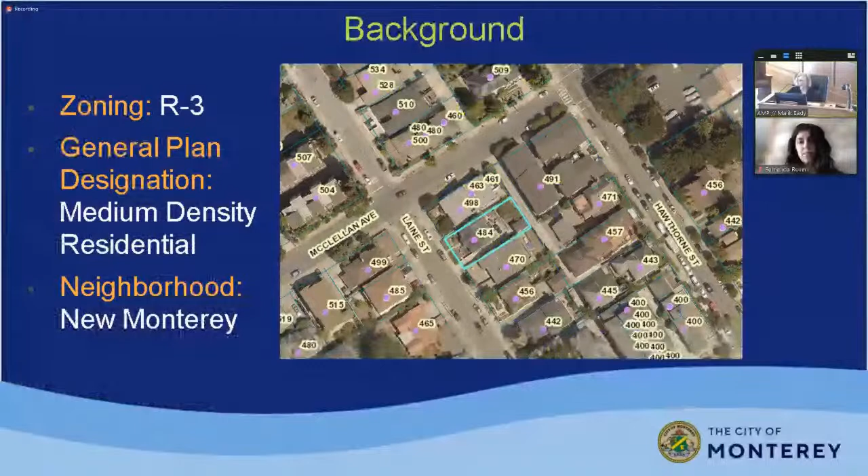As background, on September 1st, 2021, the Architectural Review Committee approved an architectural review permit for a first and second story addition, a new reconstructed and expanded second story rear deck, and exterior alterations to the two-story dwelling. I want to review what was approved under that permit, so you're familiar with what was approved then and what's being added now. Under the architectural review permit, a 435 square foot addition was approved: a 197 square foot second story main level addition, and a 238 square foot first story habitable basement addition. Also the demolition of the existing second story deck, and then a reconstruction of that deck to 272 square feet, which is also an expansion of their existing deck, so it'll be larger.

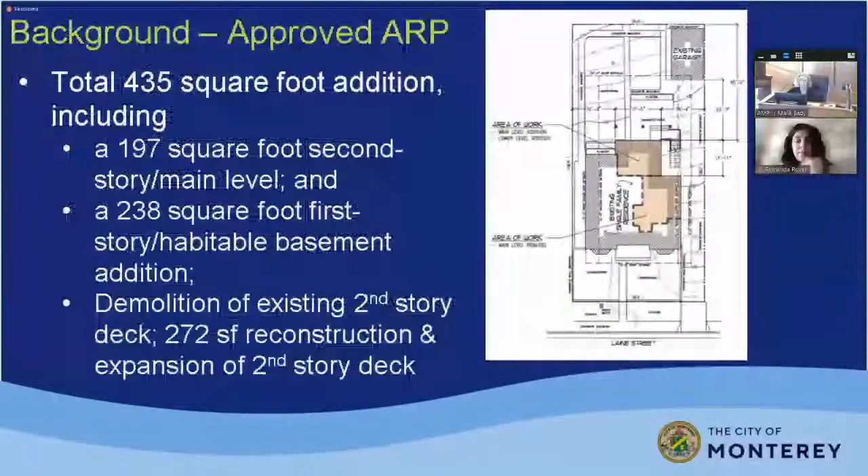None of these changes - no construction has taken place yet on this approval. So this is comparing the first and second story existing, and then the approved, under the architectural review permit. The highlighted is what was approved, the addition for the first story.

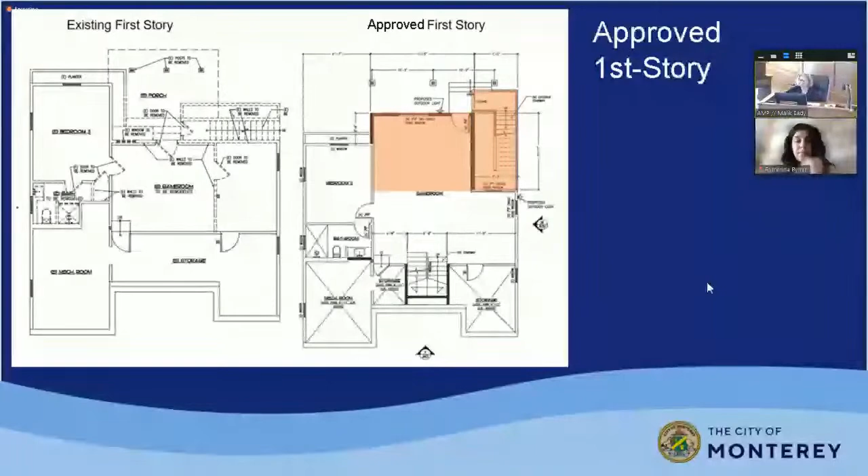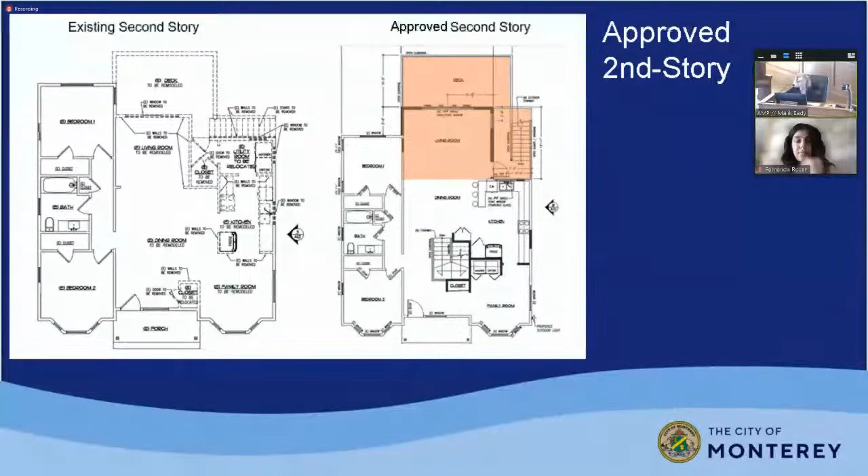Here's the approved rear addition showing the existing second story deck as it is now, and then what was approved under the architectural review permit.

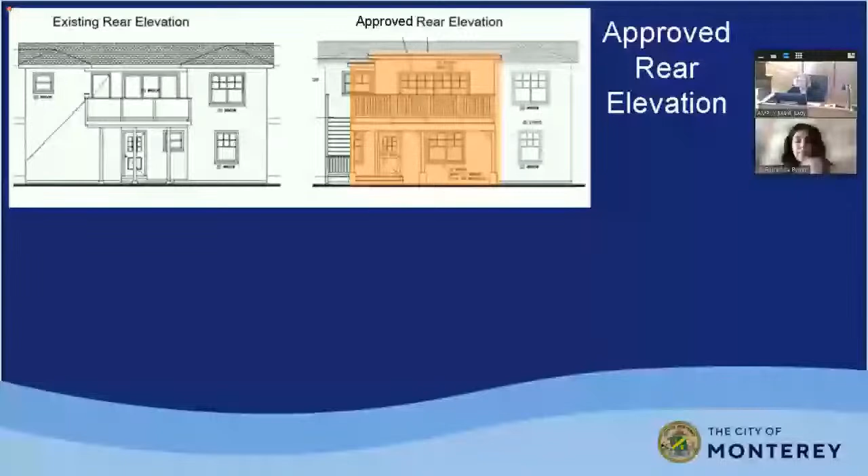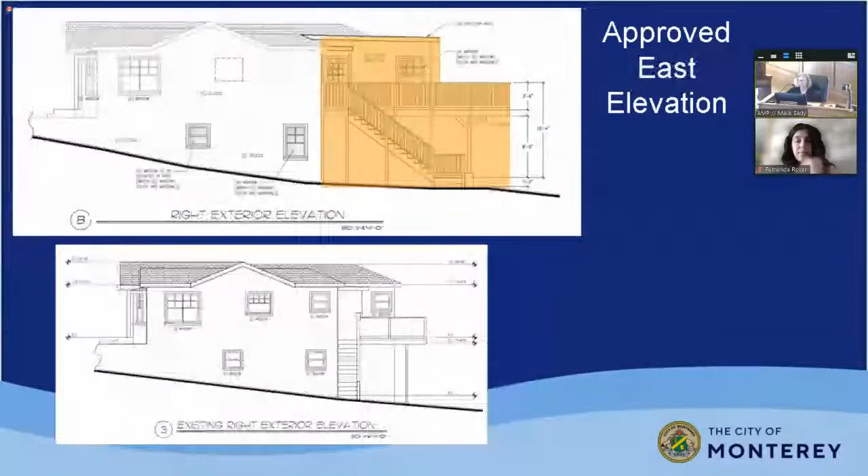The east addition here. The bottom is the existing, the top is the approved. And then what was approved was a 2% slope roof for that area.

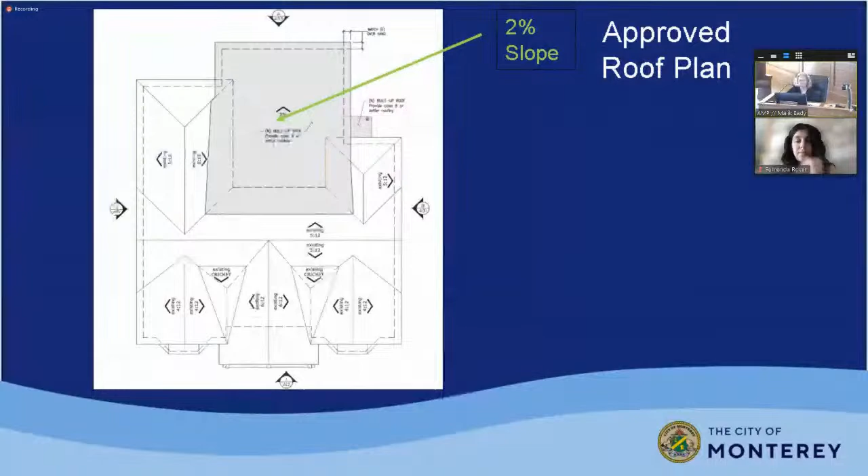Under the permit amendment for the architectural review application, the applicant proposes to increase a portion of the roof height from 21 feet 6 inches, as approved under the architectural review permit, to a maximum of 25 feet with the construction of a gable roof over the rear portion of the house.

As required, they received a letter from a professional engineer confirming the new roof structure can be supported by both the existing and new wall framing, floor framing, and foundation systems.

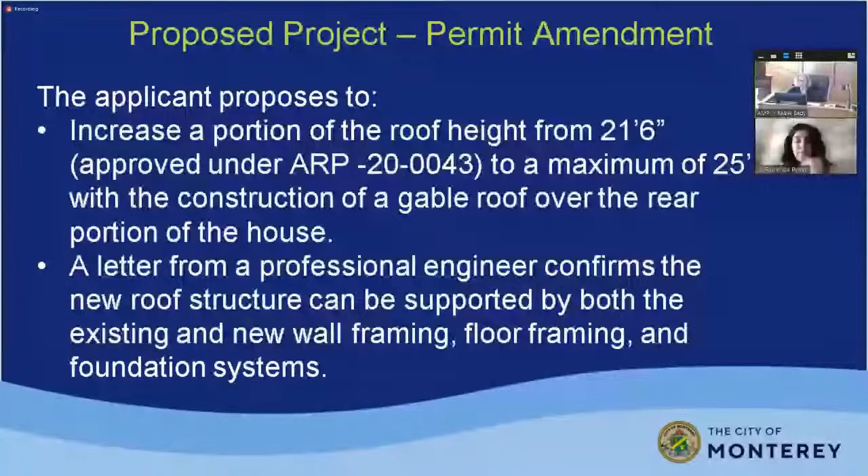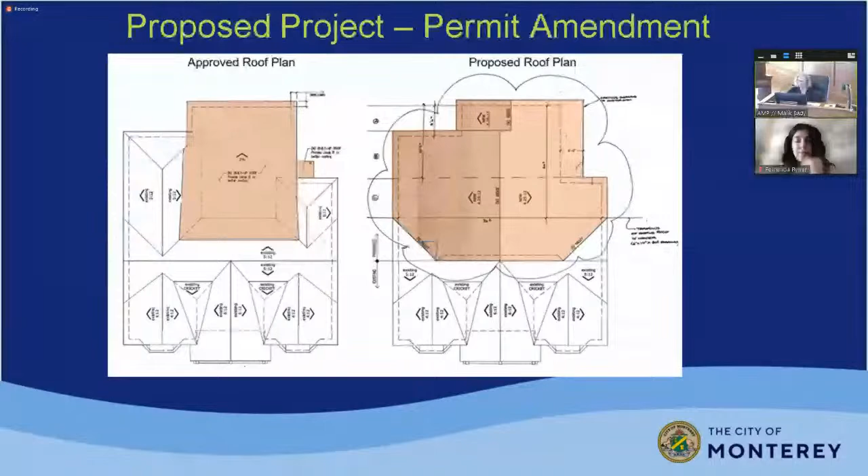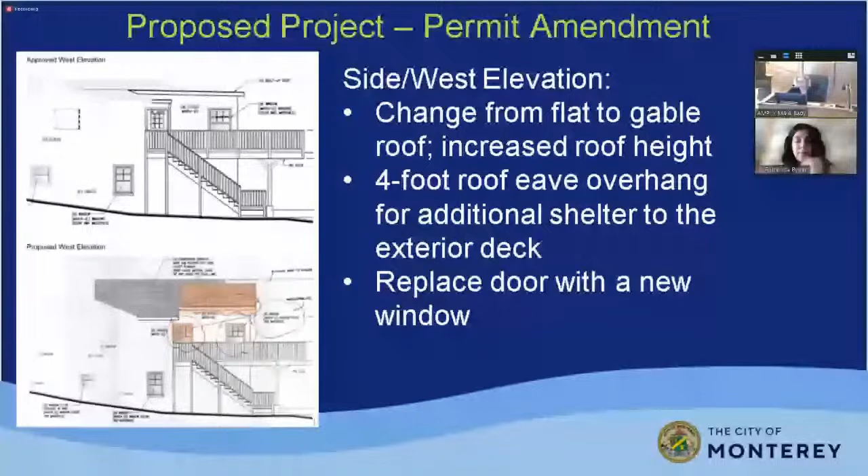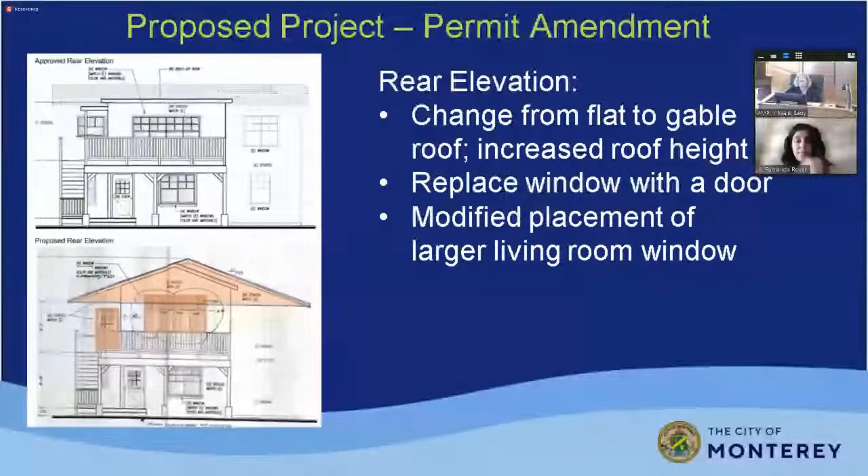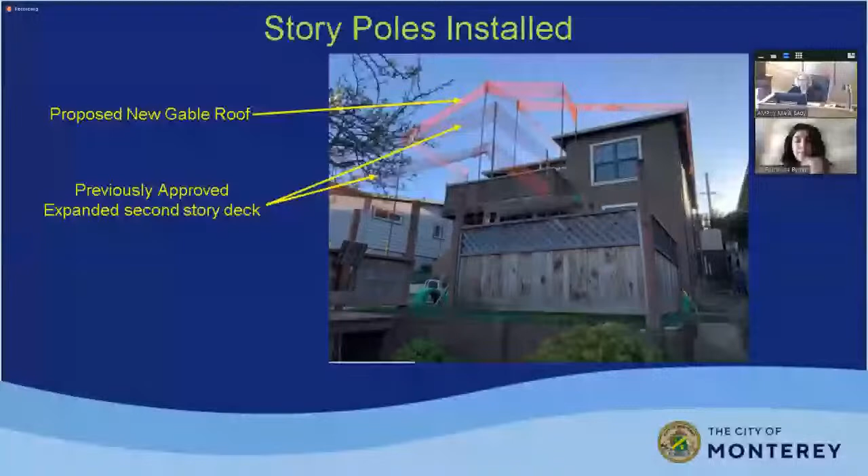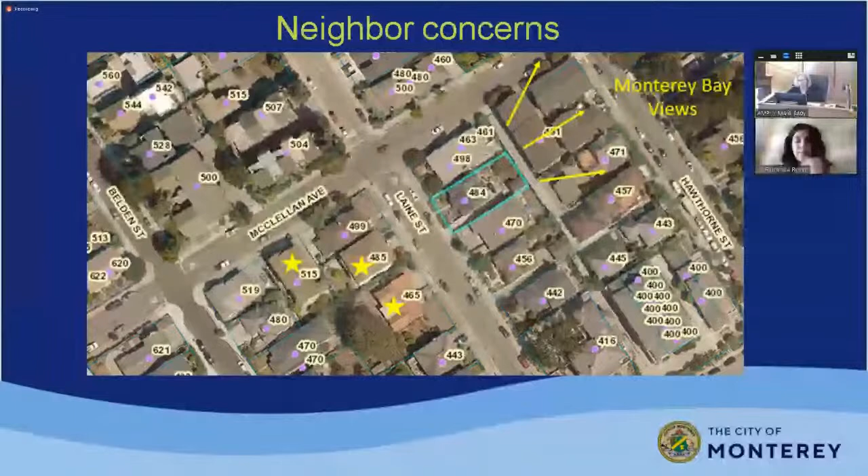Oh. Oh, that's great. Okay.

Before I go through the findings, I wanted to let you know that in attachment 2, there is a letter from one of the neighbors requesting that the property owner lower the height so they could take better advantage of their bay view that they currently have. While staff is recommending approval, I just wanted to make you aware of that from the neighbor.

I received an email from somebody—it was still the starred addresses, the people I'm talking about. They all just had concerns about their views, but this is the only actual formal letter we received requesting the applicant reduce the height.

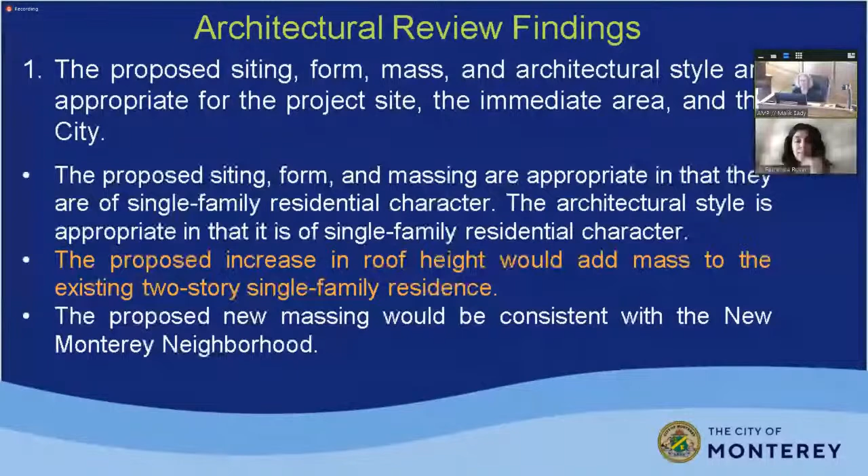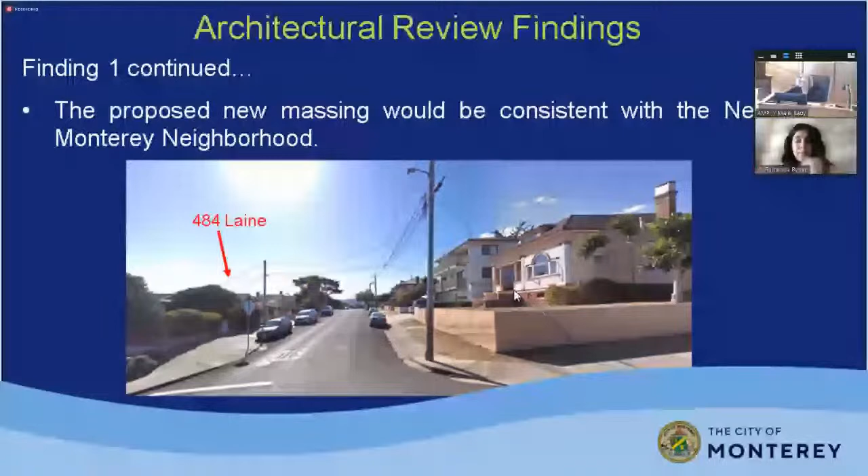The proposed project would not unreasonably impair the views, privacy, or living environment currently enjoyed by other properties in the vicinity. On the west elevation, the door to be replaced with a new window would be in the same location.

On the east elevation, one new window location would be from the previously approved rear addition.

The neighboring residence does not have a window facing the east. Maybe I should show you a picture. So this is the location here. You see the window highlighted on the proposed east elevation. That's the window I'm talking about, and it's set back a little bit.

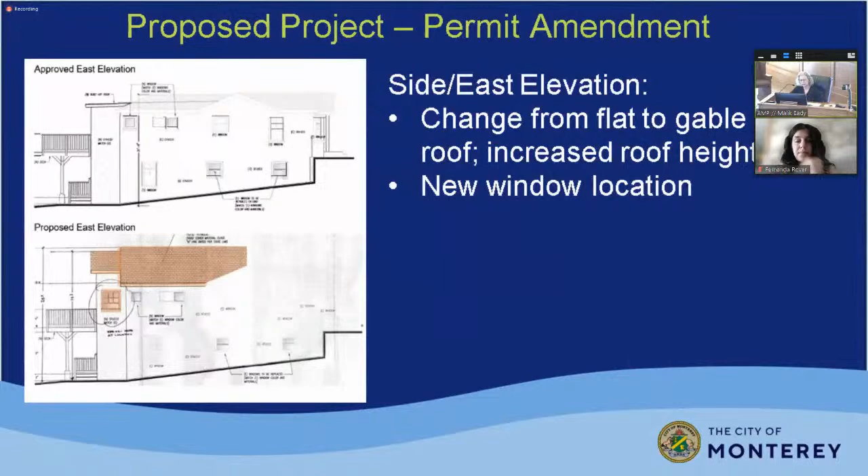So I'll go back to my finding that the neighboring residence doesn't have a window facing that east side, and the proposed new window on the wall of the house we're talking about is set back from that main house. Therefore, staff does not anticipate any privacy impacts, and the neighbor is aware of the project and hasn't commented on that. I believe she's online right now.

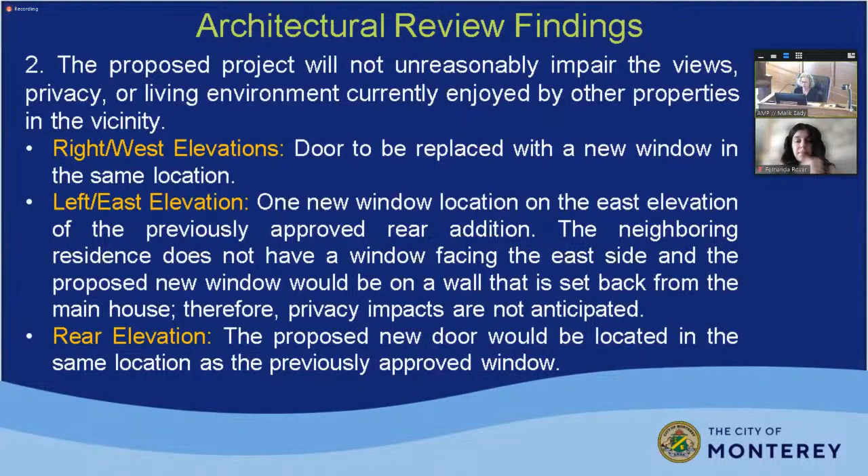The rear elevation has a proposed new door that would be located in the same location as the previously approved window, so I don't see any issues there. So there would be no privacy impacts from the proposed new window, modified new window location, and changing out a door to a new window.

The proposed increase in roof height is not anticipated to substantially change the views of Monterey Bay enjoyed in the neighborhood or living environment currently enjoyed by properties in the vicinity. While it does take a portion of it, it wouldn't substantially change their views.

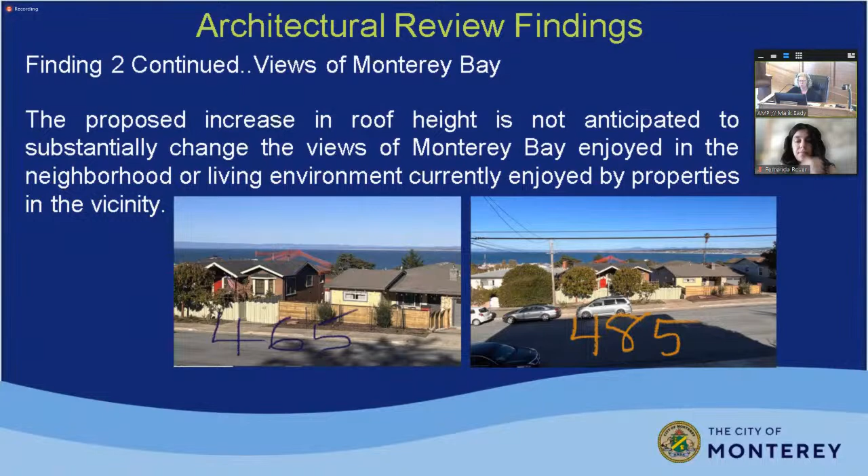But I know some of those neighbors might be commenting later, so I just wanted to make you aware of that.

The project is consistent with a medium density residential land use designation, and the remodel and addition would be of a single family residential character. It is consistent with the New Monterey area plan.

I wanted to make you aware of a policy that's in there: if the property were on a slope of 15% or more, they would need to step down any building heights in the R3 areas. And the lot is at 14%. So they just missed that, but I wanted to make you aware of that.

The proposed finish, colors, materials, landscaping, lighting, and all other exterior features will be consistent and appropriate with the immediate area. The new gable roof would be finished with composition shingles to match the existing roof. New windows would be Milgard fiberglass to match the existing windows. New doors would be solid wood to match the existing. These finishes are appropriate - they would complement the architectural style and be of single family residential character.

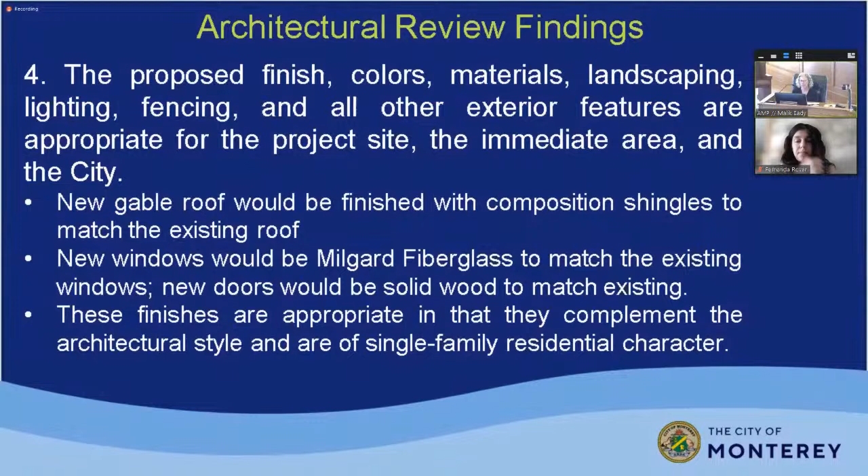Staff recommends that the Architectural Review Committee approve permit amendment application PA 220194 for preliminary and final architectural review of an increase in the second story roof height to a maximum of 25 feet, modification of the second story roof form, and exterior alterations to an existing 2-story single-family dwelling at 484 Laine Street. I'm available for any questions, and the applicant is also here.

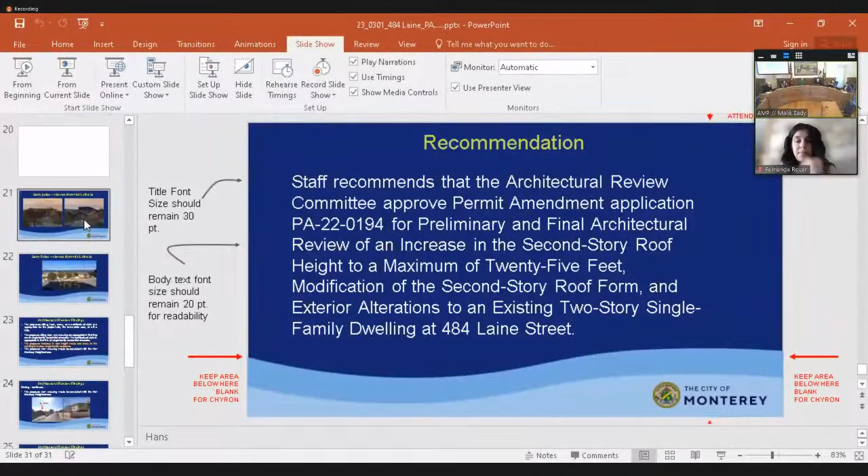Could you also please go to maybe an elevation again? I feel like I'm missing something. It seems like the height is higher than the existing peak of the gable, and I just can't tell why that is or how that would be finished on that side, which seems significant.

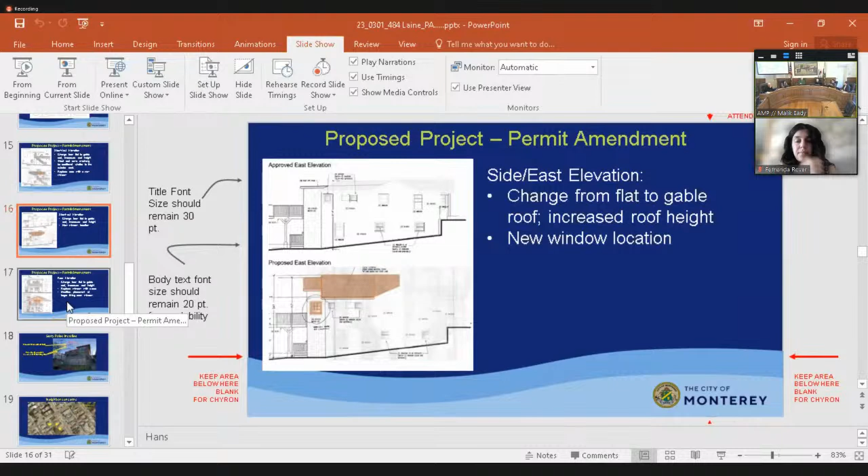Which side did you want to see? This works, but it's just a little bit of clarity would be helpful on how that's being finished on that plan, right side or the elevation.

I'm not sure, so this is a rear elevation. Yeah, but it's the other side I'm concerned about, the front elevation, because it seems like it's sticking up higher than the rest. Because that's the peak right there. Yeah, and then here it goes way above it. Because the building is wider.

But then that would require some interesting detailing, I would think, to make that work. So that part's unclear to me, what's happening.

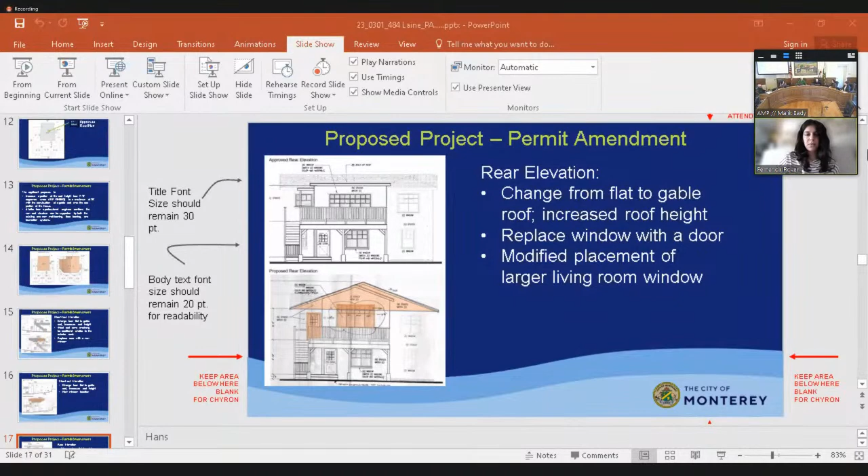We're all Zoom experts. Can you see that now? Oh, yes, now we do. Oh, great, okay, thank you, Fernanda.

The question is the height of that gable - if you're looking at an increase of basically 3.5 feet, is that how high that gable goes above the initially proposed and approved line? Maximum would be 25 feet, and that's the measurement based on the definition of height. But before we had approved a height of the ridge line of the roof at 21.5 feet, is that correct? So basically what we're looking at here, 25 feet is roughly 3.5 feet higher. Yeah.

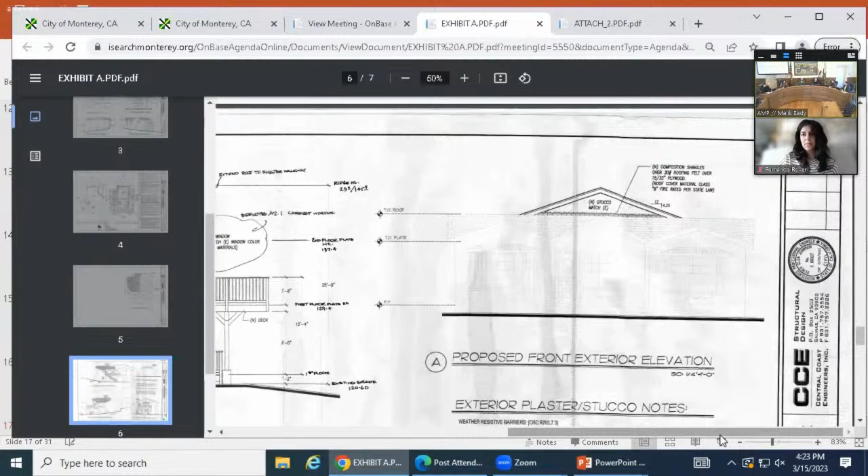And I can't read the note on that elevation - is it 4.25 and 12? It's 12 over 4.25. Okay, correct.

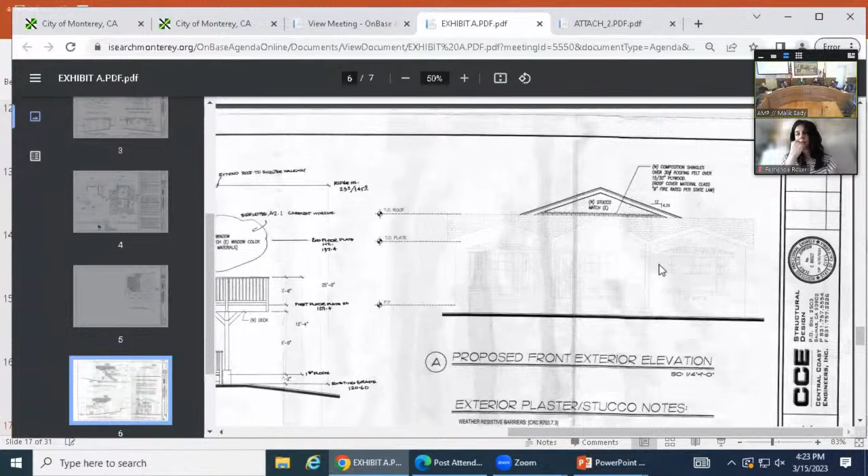Would it be possible for them to lower that peak so that - is it at the same? Sorry, is this a question or a comment? I guess a comment. Well, we can ask it. Sure. Well, I mean, is it physically possible for that peak to be moved to the existing roof line?

Or is that an aesthetic thing? I don't understand where that is. I don't see why the roof pitch can't be reduced, but we'd have to ask. Just curious. I mean, if it's like, no you can't, because then that would make the outer walls in that room 6.5 feet or something, like the slope wouldn't work. I don't know. Right, maybe you can clarify for me.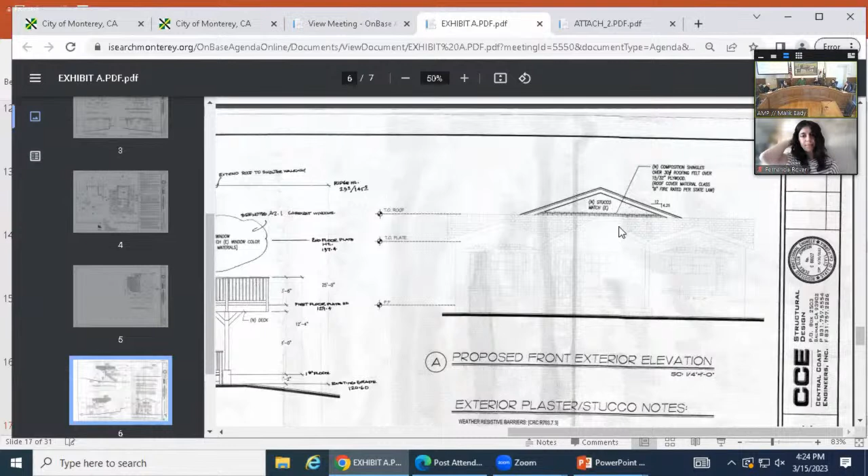This is on the front, facing the street, yes. This is the front elevation, but what they're proposing, the change in the roof - oh sorry, that's at the rear of the house. So the front is here, and this is the change. And that, what we were just looking at, was the proposed front - yes, and that's not shown in the story poles, that that's going to be higher.

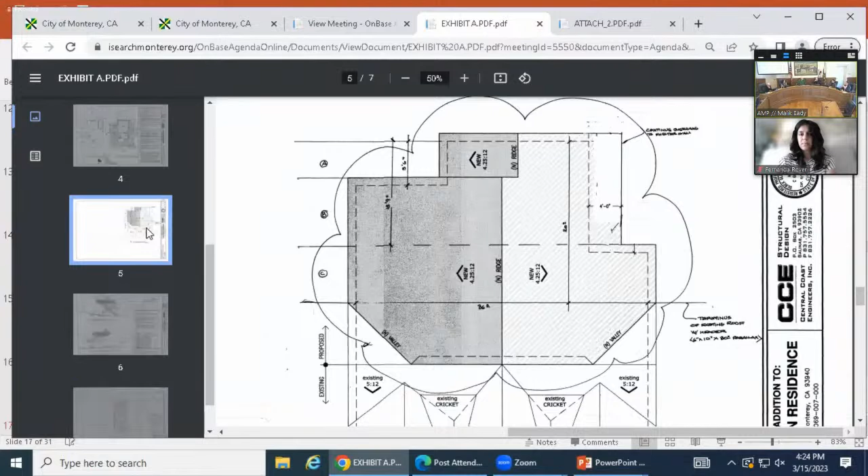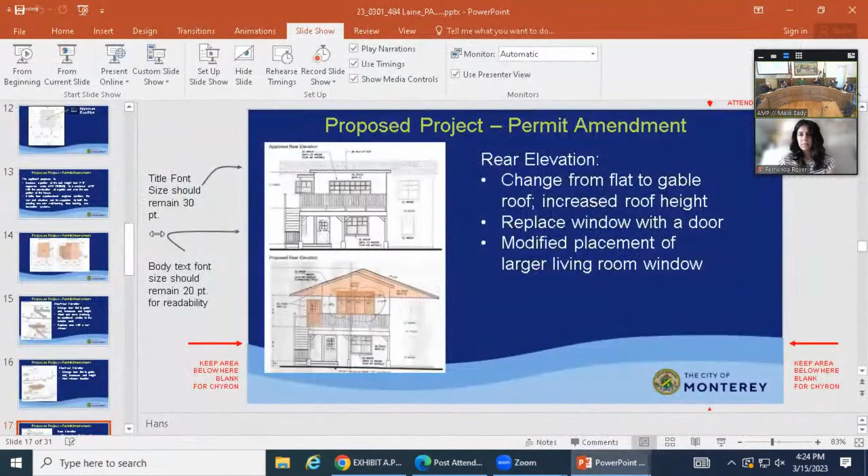We can look at the story poles. I do have that, did it show? You want me to show it again? Showed the back? No, it's the views from the other homes that show it. Oh, the neighbor pictures do sort of show it. But there's nothing on the front of the house that's changing.

No, it's an elevation. You're just seeing the back, seeing what is sticking up. Right, that's the things in the front that are faded in that image.

Do you understand that? I just want to make sure. Not really. That's okay, I'm confused. So the roof pitch changes at the rear only. That's what I thought. But you can see that from the front. Got it, okay. It sticks up above the existing roof.

I thought this was also on the front. No, that's the addition, correct, just visible from the front, sticking up from the back. Got it, right, just the back.

Are there any other houses in the area that have that kind of split? We could look at Google, but I don't know. Or just a few of those images from the residents might show adjacency.

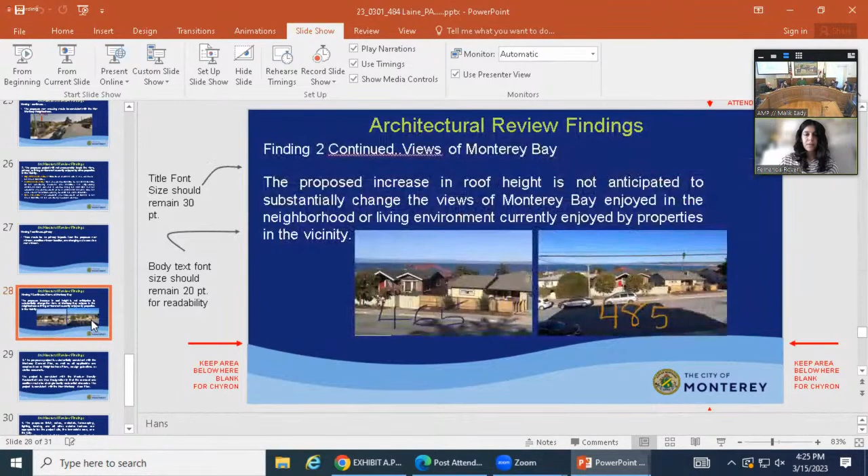I didn't hear committee member Schmidt's question. He's asking if there's any other houses that have a lower front elevation and a higher rear elevation in the neighborhood. I wasn't looking for that, but that's a very good question. I am aware of a project that was very similar to this, where a similar roof form was approved by the ARC on Lily Street.

Oh yeah, that was a couple years ago, about 2 years ago. We can do a walk down Google Street View if you'd like. I don't think that's necessary unless anybody else wants to see it.

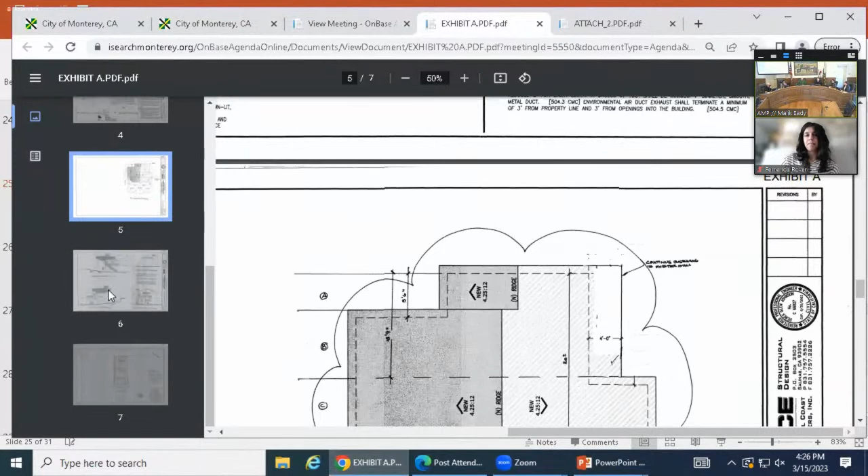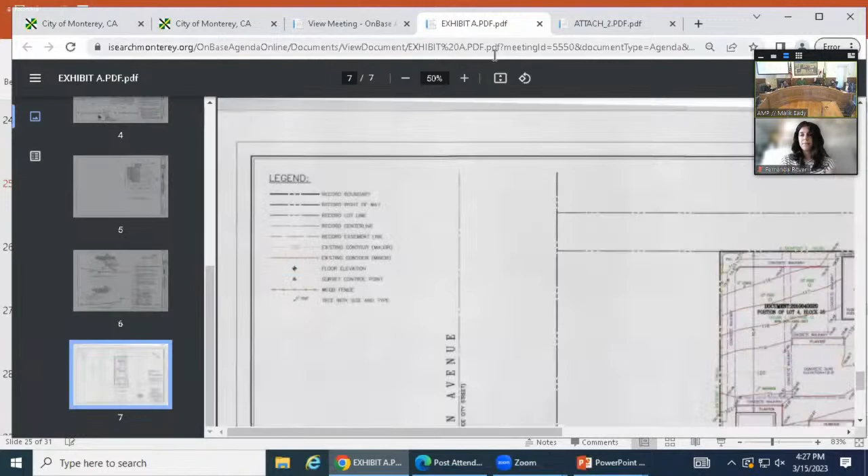Is there an existing roof plan or just the proposed roof plan? Yeah, I don't know, let me see. We might be able to look at the previous plan set, it might be there. No, I don't know if I attached that or not.

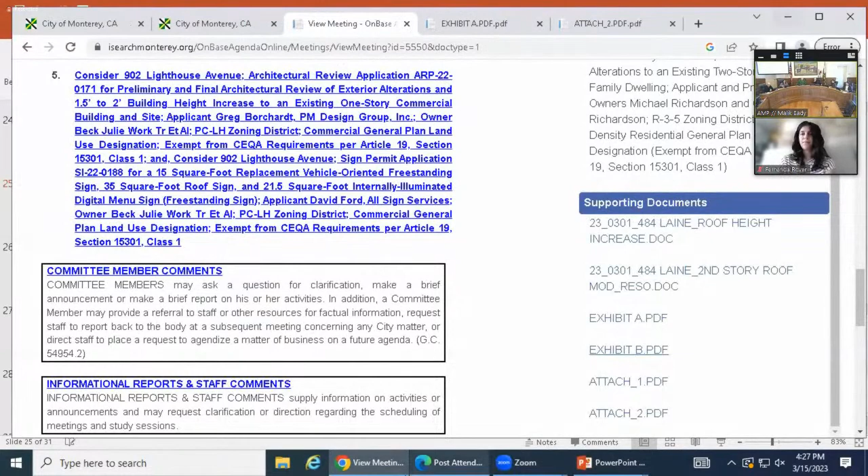Okay, that's probably where I got it. Let's look at that. Oh, in my report. If I just click on the right thing. This one, sorry, yeah, it opened.

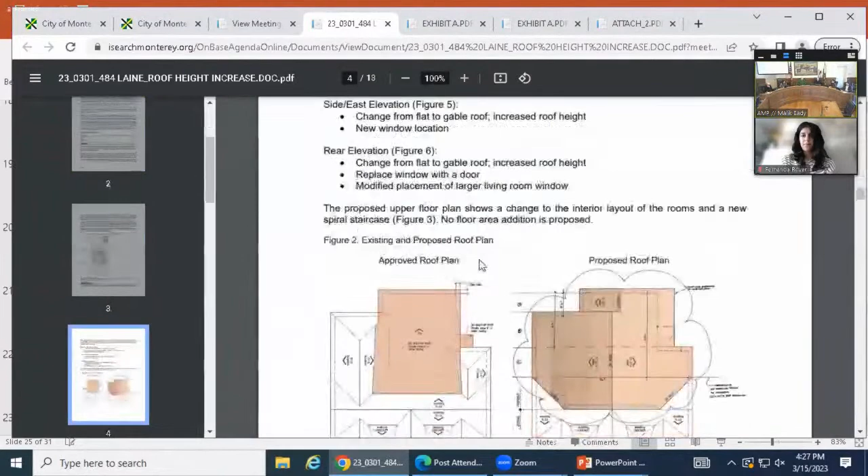Okay, yes, well at least it shows the approved roof plan. It's not showing the existing though.

Patrick, in response to your earlier question, I think if you look at the existing roof on the left-hand side, I think they're tying into those small pitched sections, and just building off of those. So you were asking if you could lower the roof. I don't think you can, because I mean obviously anything's physically possible, but I think they're trying to tie into those existing roofs. That pitch is, yeah. Got it.

Makes sense. Any other questions for Christie? If not, then I'll go ahead and invite the applicant if they'd like to make a statement.

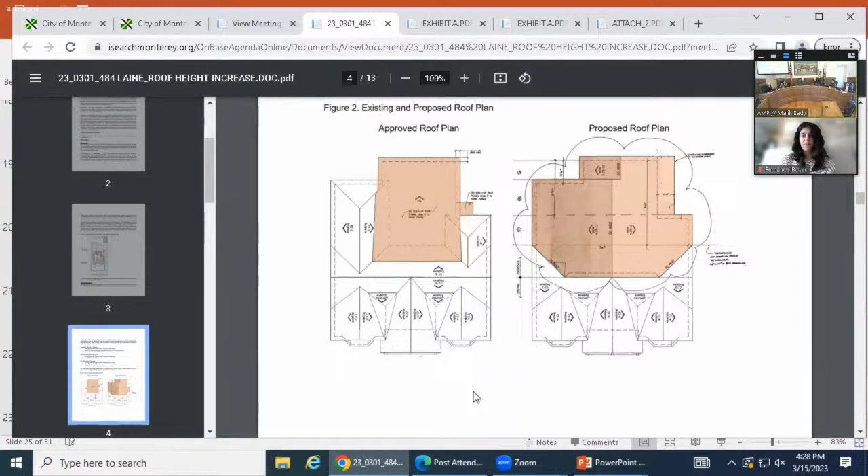Please state your name. Ms. Rivera, can you hear me? Ms. Roveri? Yes, okay, yes, thanks. Hi there, I'm Michael Richardson. My wife Caitlin and I own the home at 484 Laine Street.

I appreciate you all taking a look at this today and distinguishing between what we've proposed and what our neighbors are suggesting. I'm available for any questions, though I can't give specific technical information since Mr. Johnson, the actual structural engineer, isn't here today. But I'll do my best.

Any questions for the applicant from the committee? No? Okay, thank you. Thank you for coming.

All right, with that I'll open this up for any public comment. Do we have anyone online, Erica, that would like to speak to this agenda item? There are 5 attendees, I currently see no hands raised. I can go ahead and remind the public how to join, please.

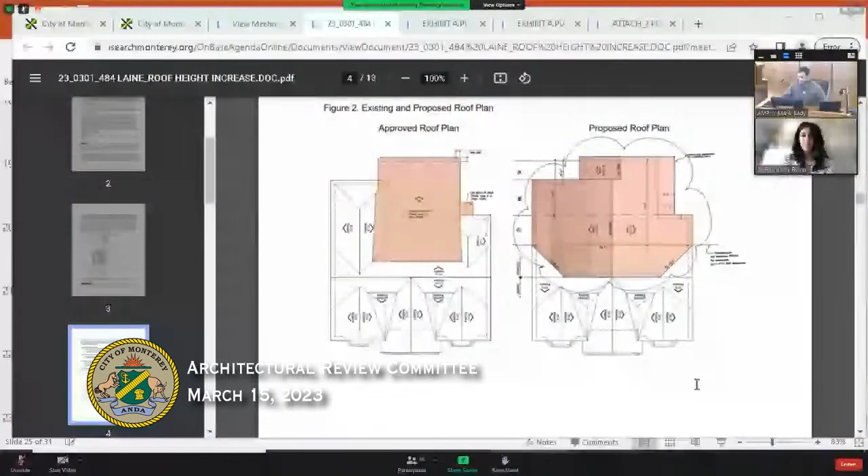Yes, thank you, Chair. My name is Chris Schmidt. I'm a senior associate planner for the city of Monterey, and I've been working with the applicants for this project.

So to shorten that title, it's a proposal for some exterior alterations, new materials, new paint color scheme, a height increase that ranges from 1.5 to 2 feet, as well as new signage at 902 Lighthouse, which is a Carl's Jr. franchise.

So staff's recommendation is to adopt a resolution approving the architectural review and sign permits with conditions of approval. These conditions actually change what the applicant's proposal is, and I'll explain that in my presentation.

So the project site is located in New Monterey. It's at the border of Monterey and Pacific Grove, at the corner of Lighthouse Avenue and David, where Lighthouse turns into Central as it goes into Pacific Grove. It shares a parking lot with the Andronicos Market.

So we've already mentioned what the permits are for. The city requires architectural review permits, ARP, for exterior changes, increases of height, new landscaping, and the like. Here we have a new paint scheme, new parapets, which constitute the increase in height, new roof material, and then new paths of travel in the landscape areas.

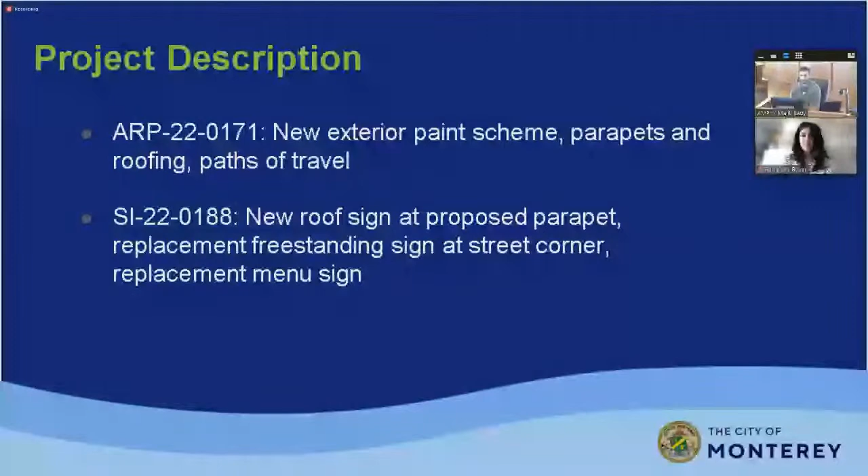So this site plan shows the site, and I've highlighted the locations of the new paths of travel in orange, and you can see the crosshatch and label for paths, as well as the locations of the new signage. The one on the right is the roof sign, the middle one is the corner sign, and the left one is the drive-through, where you can see the drive-through begins and goes parallel to Lighthouse Avenue.

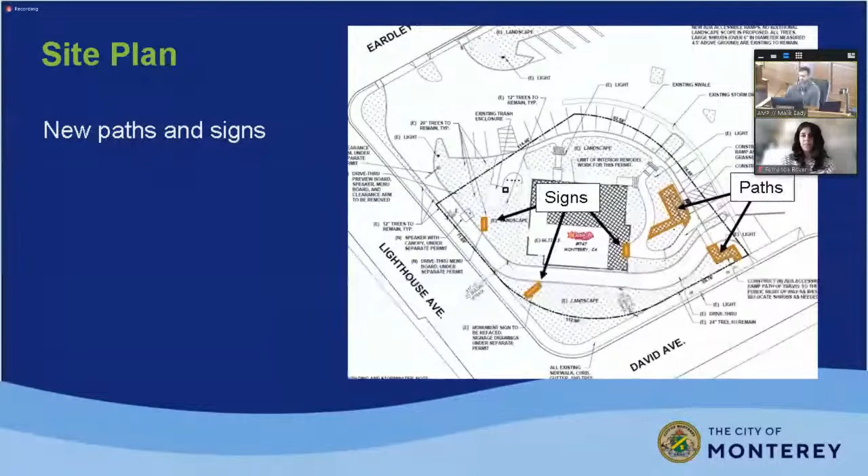Here's a view of the front elevation as viewed from David Avenue. This is where the entrance to both the Carl's Jr. and Andronico's parking lot is if you're driving up the hill from Cannery Row and the aquarium.

Going through the elevation, I've got the existing elevation on top and the proposed on the bottom. What you'll see is they're going to remove this portion of the roof here, and that's where they would add the height increase. You can see that 1.5 foot increase on the right, and a 2 foot increase on the left.

On the right hand side, that would be the new paint color scheme. The exterior siding materials would generally stay the same; they would just have new paint. You can see they would go from tile roofs to a metal standing seam style roof, and then a new corrugated parapet on the right hand side, and I believe an aluminum parapet on the left hand side.

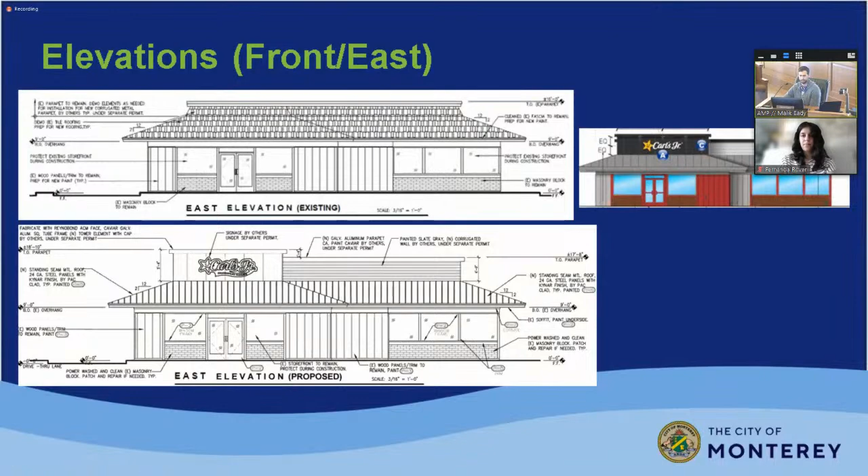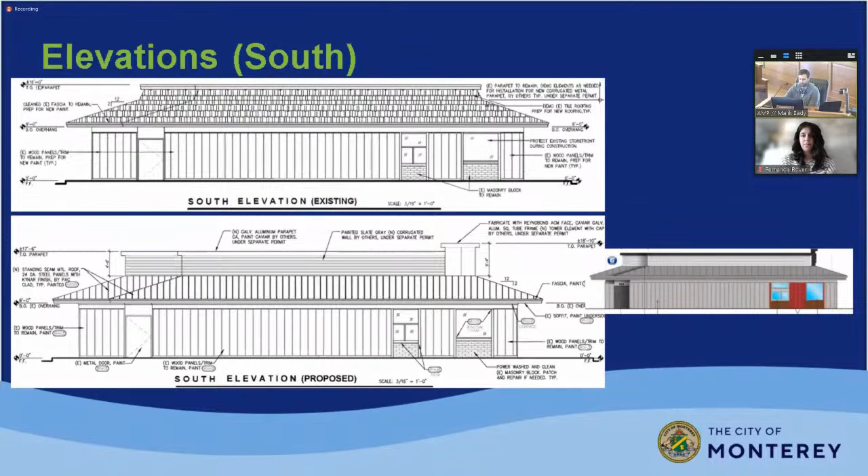Just going through all the elevations, this is along the drive-through. You can see that drive-through window on the right-hand side. This is the parking lot side. And then this is directly adjacent to the drive-through and the drive-through menu sign, which is minimally visible from the drive-through and from Lighthouse Avenue.

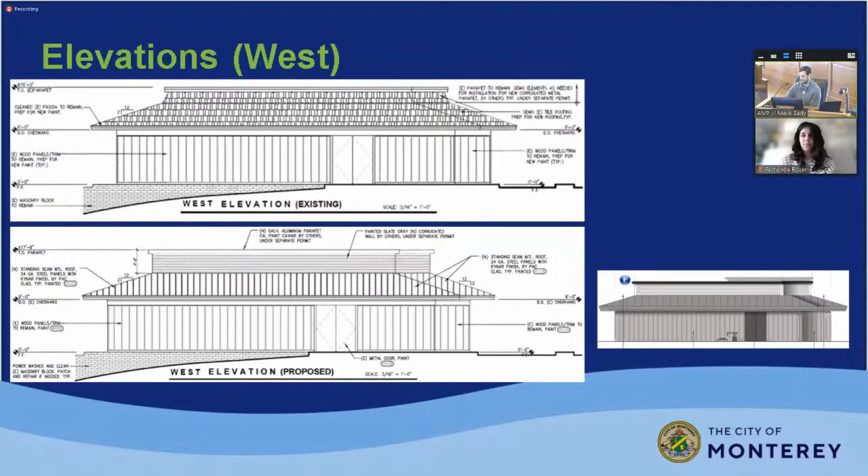So here are all of the elevations together. All height increase projects do require that the applicants install story poles and netting, so you can see from the front entrance what that height increase looks like. It's generally pretty small.

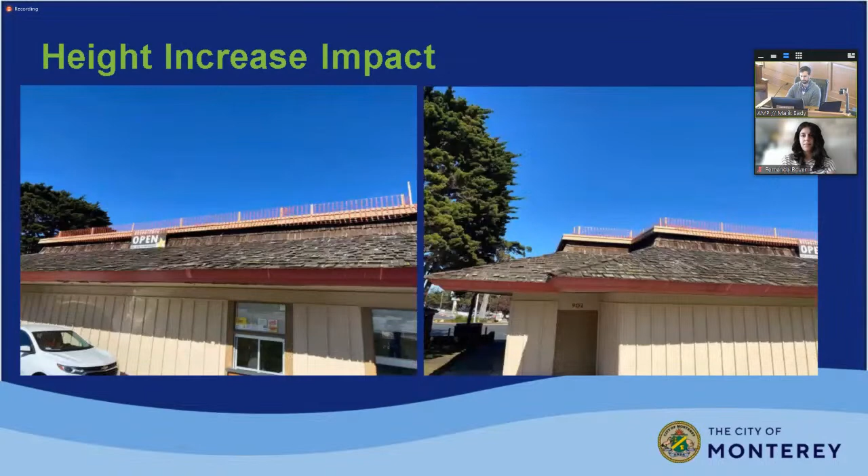So moving on to the sign. This is the first sign here. It is 35.22 square feet in area. The city has classified this as a roof sign. It would be an aluminum composite material, and Carl's Jr. has an updated logo, which they're showing here.

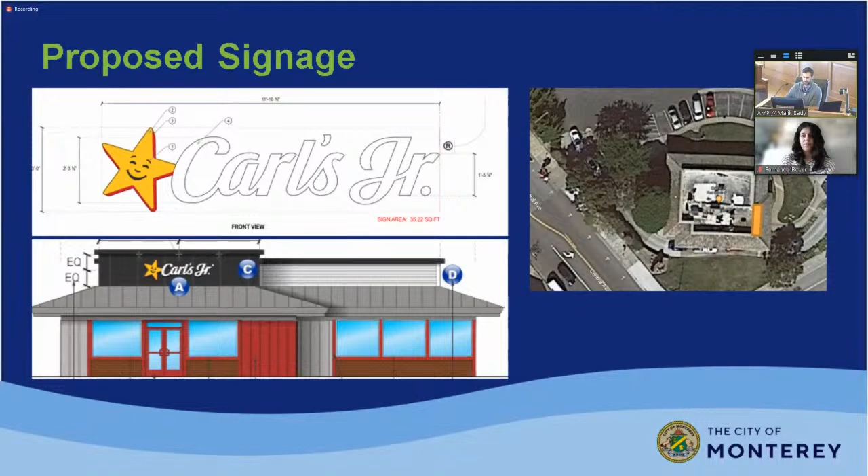I'll note that the Lighthouse specific plan has two standards that regulate signs. If you read the specific plan, standards are requirements, whereas guidelines are generally suggestions. The first requirement, S61, is that vehicle-oriented freestanding signs are prohibited except where a primary building is substantially set back, such as is common with a service station. The second one, S62, is that internally illuminated signs are prohibited. So the city has classified that menu sign as an internally illuminated sign.

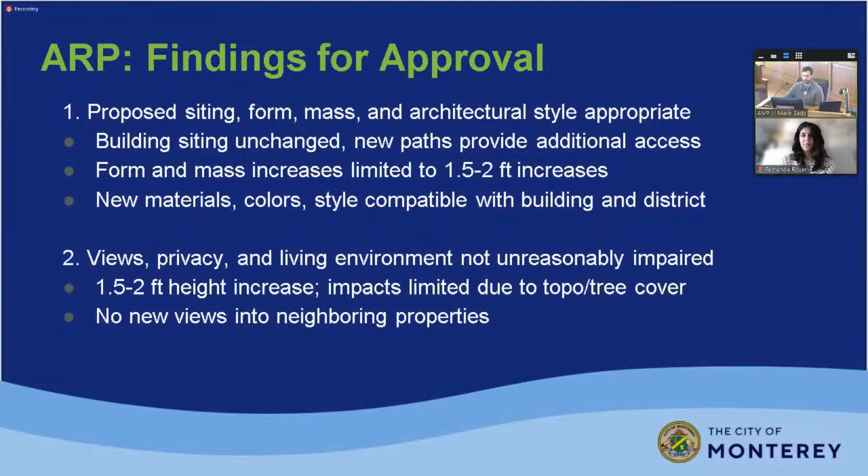Finding number three: the project is consistent with city plans and design guidelines. As conditioned, staff made this finding. It is consistent with the general plan, and the design and use is commercial in nature. Again, as conditioned, it would be consistent with the specific plan by removal of the internal illumination and inconsistent lighting.

And then lastly, staff found that the project's exterior finish, colors, materials, and all of their features are appropriate. The materials and colors are high quality and they're compatible with the site and area. Some of those new horizontal elements at the parapets and the new standing seam roof break up some of that massing. So staff was able to support this.

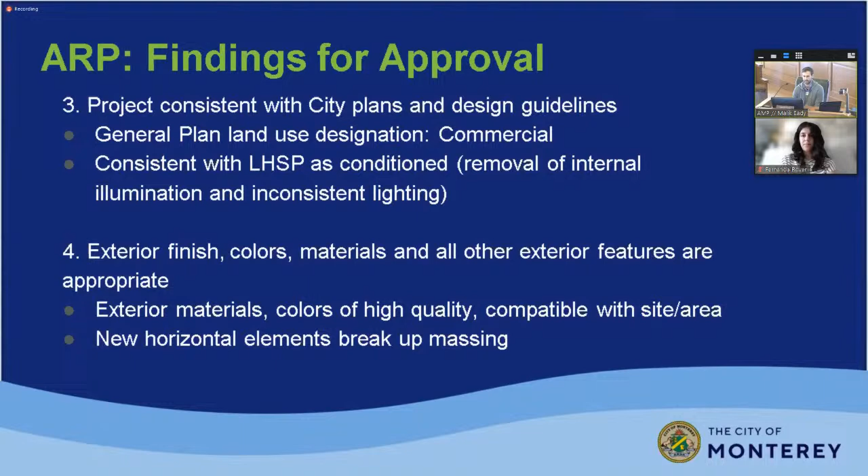Moving on to the 3 sign permit findings. The first is that it has to achieve the purposes and objectives of the sign ordinance. Staff made this finding. The signs are an effective means of identification and communication of the use, and as conditioned, would promote equality and equity among sign owners. Generally, no other signs in this area would allow internal illumination, or even pole mounted signs.

So staff is strongly suggesting that the committee adopt the condition. The next finding is that the project is consistent with sign guidelines or better achieves the purposes and objectives than strict application of the guidelines. Staff was able to make this finding. The signs are compatible and achieve the purposes and objectives as previously stated, as conditioned. And lastly, the project is consistent with the general plan and specific plan, as conditioned. So again, staff's recommendation is to approve.

I'm available for questions. I believe I did see the applicant online as well. Thank you, Chris. Any questions for Chris from the committee?

Just want to be clear that the rooftop sign is not — it's not, they show overhead gooseneck lighting. At this point, staff is not on board about those because they did not provide that photometric report. That's my question: spend this money to put the sign up, but they're not going to light it? Right, or they're going to come back with it later.

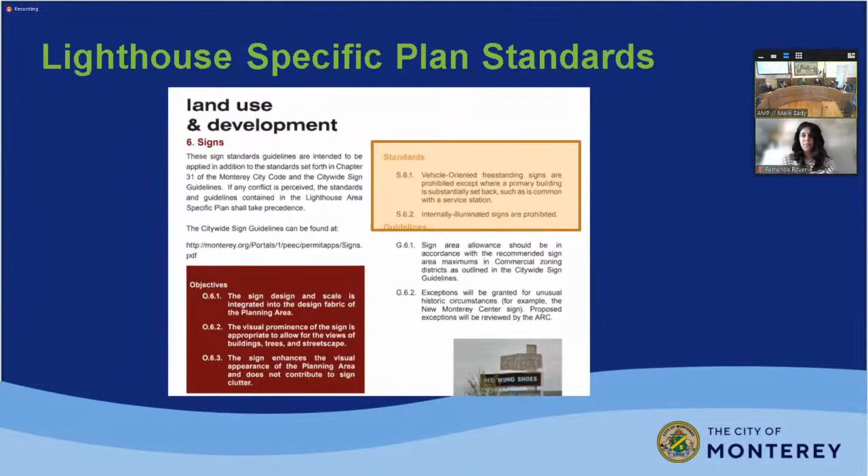It's probably going to be blurry, but it just shows you what it looks like. I thought that all of those kinds of menu signs were internally illuminated or had some sort of light, because how do you see it at night? There must be some sort of light on it, but I could be wrong — I didn't go there at night. Okay, usually, you know, if they don't have it on the inside, they can have it on the exterior, right.

If it is illuminated, there- the brightness level, yeah, it's right there, kind of in the shadow. It looks like it could be illuminated based on its location and the size of it. Would they propose to replace it with something else that's illuminated? And if so, what's going to be more of a light impact, the digital or a replacement of what they have now?

It's a good question, kind of moot because we wouldn't approve an internally illuminated one that's existing today. So they could maintain the existing one, they could choose not to remove it. If they applied for something similar and updated, we would also recommend denial of that.

Thank you, I guess this is a question to planning. I've seen, say, the McDonald's, they don't use their colors and things like that. Is that something that planning panel enforces? Or is that something we would recommend as a panel? If you wanted to change the color scheme for this project, I'm just curious how that goes about. Is that something like making the star gray or the arches black? Yeah, is that where that comes from? The committee could request a different color scheme. We're not bound to the franchise's color scheme.

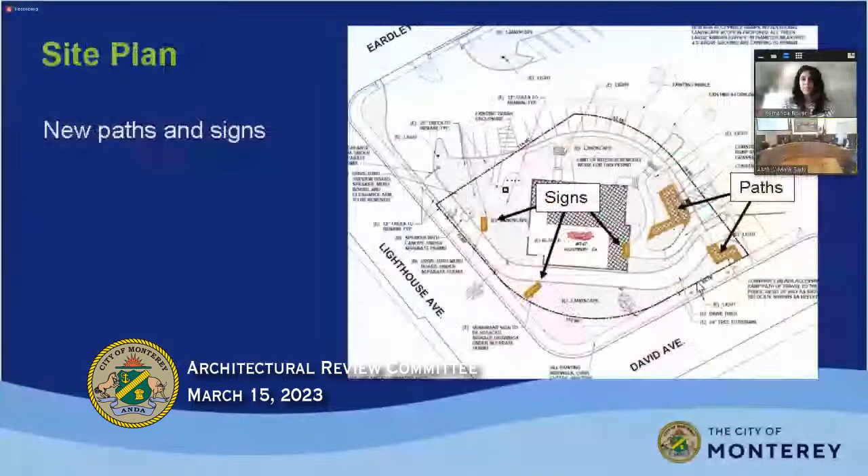I'm in agreement. I'm actually not excited about this change. I think originally this was done with a character that had shingled roofs—even the custom lighting there is actually pretty interesting. Somebody cared about the character and feel.

Looking outside here at the shingled rooftops, it's already an anomalous building that really stands out, just from the character of the more urban surroundings. I don't think you're going to miss it, so that's not an issue in my opinion.

I've actually generally wanted to see the signage change from its current bright colors to something using natural materials. They can be contrasting—those would have been my recommendations regardless of whether this was coming our way.

I like standing seam generally, but it seems like a worse situation than what it is currently, and I don't like to make decisions like that. Its existing shingled character seems more fitting with the neighborhood, in an already anomalous piece.

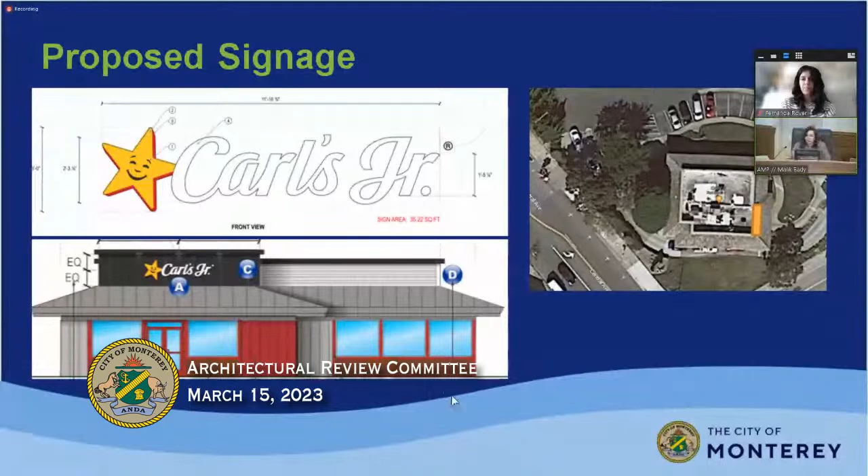I like the fact that the digital is less lighting-intrusive, it's shorter, but I must have missed the heights—what's existing versus what's proposed. With us not knowing what's going to be there, whether it remains existing or changes, I'm kind of concerned.

Unless there's a condition that they have to come back for approval for that specific sign, which they may have to anyway because of the sign ordinance and the lighthouse plan, I have some concerns not knowing what's going to be there.

To echo Pam's point, I am concerned about how they plan to mount that sign. We just don't know—if they keep what they have, it's brighter, it's taller, and it looks like a sign on a post or on two posts. So just not knowing has me concerned about what may eventually go there.

Thank you. Patrick, did you want to add something? No, I just, after hearing Pam speak, I think my criticism of the existing building was it just looked really dated.

That doesn't mean that a revamp of that couldn't have used more natural materials. Like for instance, the Starbucks uses lots of wood, and this is very metallic, bright red, black, gray, very institutional looking.

And it just looks like you could be at a truck stop somewhere. It's just like a fast food place from a truck stop to me, the more I think about it. So I would like the applicant to consider maybe going back to the drawing board a little bit and coming up with some softer elements, to kind of blend a little bit.

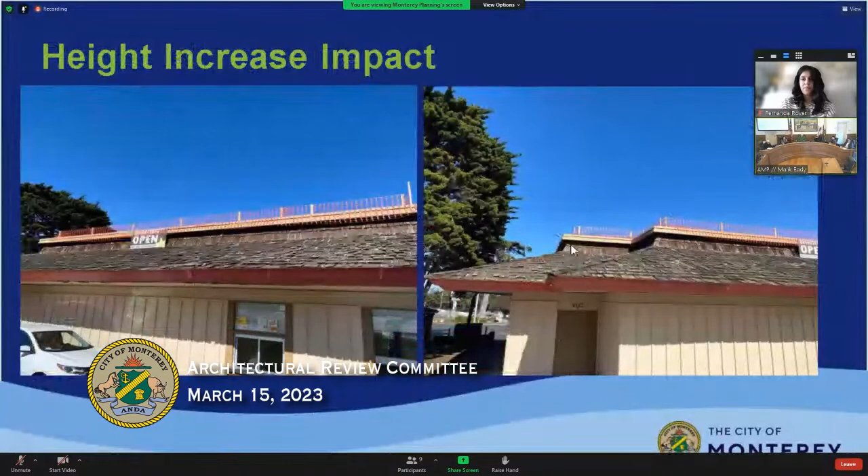I guess I would just say if we're going to kick it back, that we be real direct with the language that we use, telling people that we want a softer approach, you know what I mean? Like, it's tough having been in this position where a building's getting kicked back.

Like, are we asking them to get rid of the metal on the fascia? Are we asking them to get rid of the metal roof? Or are we asking them to maybe paint it more earth tone colors? Like, can we give these guys a little bit more direction, whoever they are? Could we give them a little bit more direction as to what we're asking them to do?

Like, for instance, in terms of the size of that sign, is it the manner in which that parapet is popping up higher than the other parapets? Like, if they were to lower that so that it were a single line around the roof, would the size of that sign be okay and less pronounced?

Is that like a corrugated metal fascia on the rest of the parapet? Correct. Yeah, if that were natural wood slats or something like that, as opposed to metal, or something contemporary but softer. Yeah, it's a very good point and commentary.

It's, yeah, I actually agree with a number of the recommendations you're making. Say that if that parapet were just a parapet and simple, the same height all around.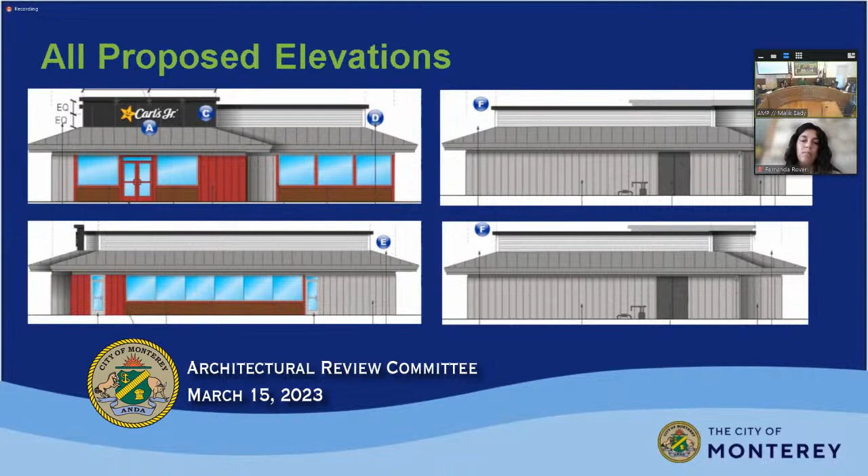Since we're all here, can we just discuss the menu sign? After hearing Mr. Rosenblum, I think we're all going to see these plasma screen displays that are digital, basically big flat screen TVs, and I'm totally fine with that. I think it looks better than a fluorescently lit, illuminated fast food sign. And it's dimmable, so your daylight setting isn't what you have 24/7. As far as that goes, I'm fine with it. I would like to see what's the existing sign height

and what's the footprint of the new sign, so we could see. I'd imagine the new sign is smaller than the existing sign because they're continually changing the content on it. I'm not sure if that's the case or not, but I just want to go on record and say I'm okay with the new menu sign and the other two sign things.

Moving forward, I think I said the same, as long as it comes with that base, not just a single pole, something that was recommended by Chris.

All right, Steve's had his hand up. Yeah, we'll go ahead and have Mr. Rosenblum go ahead. Can I clarify something first?

Yes, please. So internally illuminated signs are prohibited by the Lighthouse specific plan. So just when you're discussing that part of the sign, we cannot make the finding, the third required finding, that the application is consistent with our land use documents, because of that internal illumination prohibition.